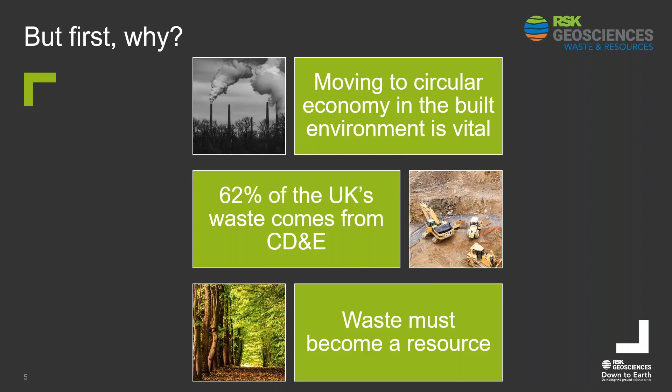So onto the waste hierarchy and circular economy. Both the waste hierarchy and circular economy have evolved over time to emphasise the design and use of a product or material before it turns into a waste. The waste hierarchy is a tiered approach which aims to maximise prevention and minimise, or ideally eliminate, waste disposal. And the circular economy aims to eliminate disposal and take it that one step further in preventing the generation of waste altogether, and then maximise the use of the resource from those materials.

Therefore, we can see that circular economy principles and the waste hierarchy share a joint philosophy, aiming to manage resources by rethinking, redesigning and repurposing in order to improve the resource effectiveness of a product or material and to reduce the generation and adverse impact of waste. The minor difference is that the waste hierarchy still allows disposal, while the framework of a circular economy doesn't, looking for materials to be reused and waste to be designed out to begin with.

The circularity principles can cover all materials. It doesn't just need to apply to items, it can apply to excavated materials and materials produced during demolition. Considering both these concepts to create a sustainable future, a regenerative circular economy that rewards the reuse of finite materials and resources must take priority and be the first consideration in the construction process.

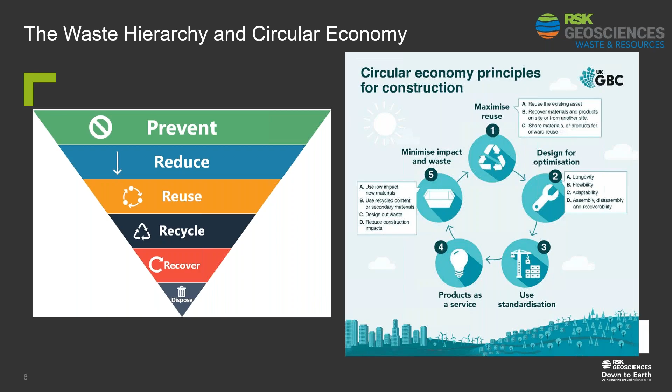Firstly, I'm going to have a look at the design and pre-planning. Applying circular economy principles and increasing sustainability in a construction project needs to be implemented as early as possible. Design and pre-planning is a crucial step to ensuring circularity and sustainability is weaved through as many aspects as possible in a project. It's a time to understand goals, policies and requirements, and to start the ball rolling with mechanisms and actions that may be required to implement that circularity.

So firstly, the design review. Designing the project for optimization is a key first step. It is important to give consideration to various aspects of the design to help implement circular economy principles, such as the longevity of the design - how long will the materials and design itself last - to ensure maximum use of products in their current use and state.

Design flexibility so that improvements and changes can be made. Consideration to the adaptability to changes in the environment as the climate changes around us, and also thinking about assembly, disassembly and recoverability considerations, to ensure materials can be disassembled in a state that can be reused for the same purpose again, or can be easily recovered as a resource for reuse elsewhere.

Circularity doesn't just need to apply to the building and structures being created, but also the materials generated through the process. Materials created during demolition, and the materials generated through site preparation and excavation, can all be considered using the same design aspects.

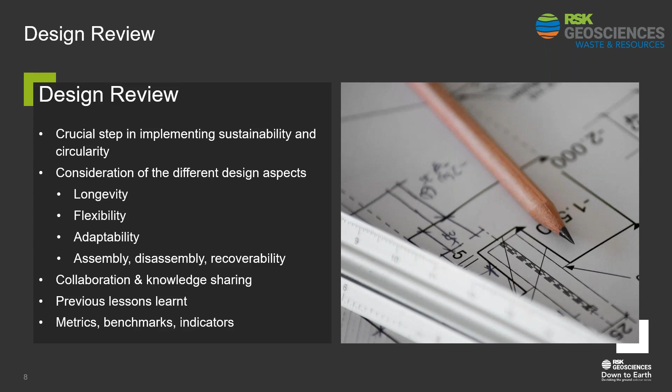Next is the pre-planning and early engagement. This is a concurrent important step alongside and following the design review, and it's where the team can start identifying what mechanisms may be required to implement circularity, especially with consideration given to those which may require permits or regulator liaison, and also to allow enough time for these to be undertaken.

Early engagement with subcontractors, consultants and regulators about the potential practical steps required is also useful at this stage. Subcontractors will have a wealth of experience and knowledge that could enhance the circularity within the project. Consultants can start to action the mechanisms where there might be permits or supporting documents and reports required, and regulators can provide early advice and guidance around what potentially can and cannot be done.

Supply chain engagement is another one at this stage - understanding what they can do to reduce waste being produced through streamlining, off-site construction and even packaging reduction, but also what circularity mechanisms they can provide, such as take-back schemes and repatriation schemes. This stage is really crucial, as ideally everything should be identified and in place prior to the project starting on the ground, to make the most of those circularity mechanisms available.

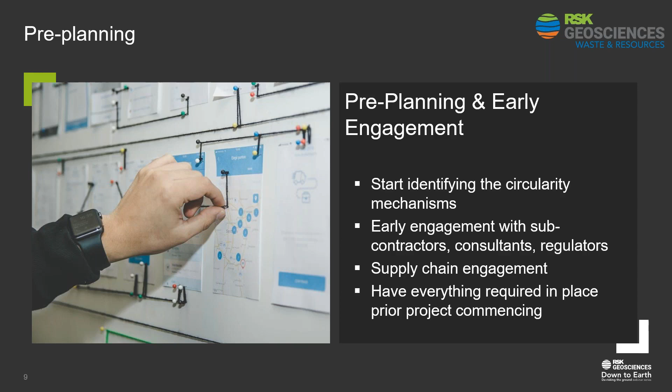So starting to think about the mechanisms that can be used to support circularity decisions at this stage. Firstly, site waste management plans. These are often used - you see them on lots of different projects - but they come in many different forms. Some can just be a bit of a tick box exercise to say that there is one in place.

But if done correctly and early in the project, they can be a really useful tool to identify where improvements can be made. Even if the waste volume and information are still estimates at this stage, the tools can identify your hotspots of material and waste generation from the works, the types of material generated, and from which phase of works these will arise.

This can then act as a guide and be further refined, so thinking about where large amounts of materials or wastes are being produced, what can be done to prevent these from being created, could the design be changed, or could other mechanisms be used, or can this material be reused elsewhere in the project?

Where there are difficult to manage wastes, what could be done with these to increase circularity, with consideration given to the chosen routes where waste needs to go off-site. Is it going to a reprocessing facility, or is it just going to landfill? If it is going to a reprocessing facility, what are their recycling rates, and are there any better options available?

Alongside this, it is a useful time to start considering carbon assessments and putting some high-level figures to the activities being undertaken. This can help with sustainability considerations and provide a different view on the materials and wastes being produced. So your site waste management plan looks at quantities and volumes, but your carbon assessment might look at how much carbon is associated with those activities and materials, showing different hotspots you might want to look at during the project.

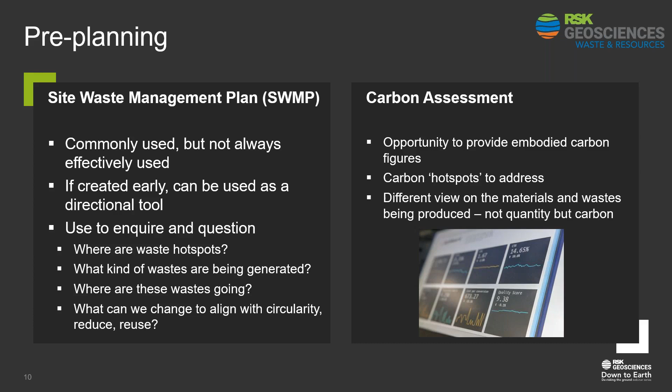So optioneering and material reuse feasibility assessments are another useful pre-planning tool. To help assess what mechanisms can be utilised, these assessments can be undertaken. They can be completed on one site or project, or on a larger scale, and if there are several projects and sites, this may actually open up more options and have more scope for implementing circularity on those individual sites and between sites.

These assessments utilise the site waste management plan and the design information to understand what materials and potential wastes will be produced from the works, whether demolition or excavation or both, and look at where these materials can be reused in the design, whether for temporary or permanent works, or even turning these products into end of waste mechanisms for reuse or resale.

The assessment can assess each of the available mechanisms and understand the applicability based on the project aims around material reuse and circularity, the materials and waste being produced, and timeframes and feasibility. The outcome is a series of suggestions and mechanisms which may be used alone or in conjunction with others to manage the materials and wastes and turn them into a resource for the project or projects.

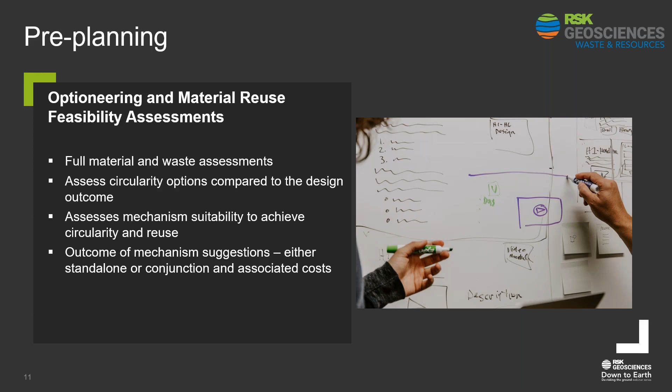So some of the mechanisms which might come out of these assessments are ordered in circularity favourability. Some mechanisms allow for materials not to become a waste, offering more flexibility longer term so waste regulations won't apply. Others utilise a material once it is defined as a waste, and others allow for a material defined as a waste to reach that end of waste status and criteria.

So firstly is preventing the material from becoming a waste in the first place. The Environment Agency puts this burden on the producer or holder of the material, who should work out if their material is a waste, whether it has been discarded, or whether it has never become a waste and meets those reuse requirements, or whether in some circumstances it has stopped being a waste and meets that end of waste test.

So everyone should be familiar with the definition of waste and that discarding element, but what about the reuse element? According to the EA, a material will not be a waste if the following apply: it is used for the same purpose for which it was designed, so the use must not be subordinate or incidental to the original use.

The previous holder intended it to be reused. No repair or no more than minor repair is required when it is transferred from the previous holder to the new holder. Any necessary repair is going to be done. Its use is lawful and is not managed in a way that indicates it is a waste.

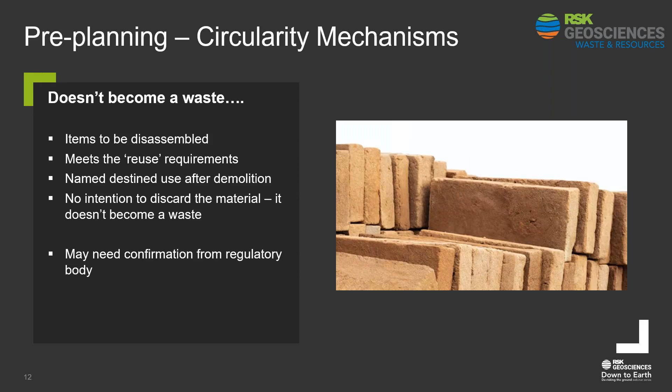it may be something to look into and may help with that flexibility of material and product reuse. So for excavated soils, the CL:AIRE definition of waste code of practice is there, and this can support with circularity being implemented and the excavated material not becoming a waste. So if the CL:AIRE DoWCoP can be complied with and the 4 principles within it demonstrated and evidenced, the excavated material can be reused on the site of origin or reused off-site without becoming a waste.

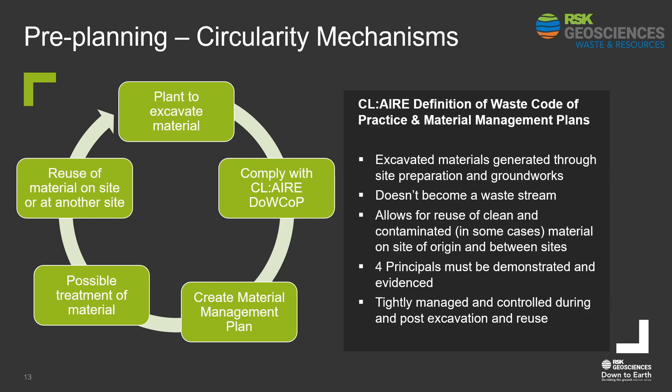Hub and cluster projects can be utilised if there are soils which require treatment prior to reuse, therefore improving the resource reusability and longer-term circularity. Obviously, this does all need to be done using a pre-approved materials management plan and tightly controlled throughout, but it is a really useful mechanism, and it allows the reuse of large volumes of excavated material either on your own site or between sites, and should definitely be utilised more often, especially with the upcoming exemption reforms next year.

Another mechanism to have a think about is the WRAP quality protocol, aggregates from inert waste. This is another end of waste option. In the project, if the project is producing inert waste, then you may be able to reprocess this under a controlled factory production control manual and potentially other permit requirements to produce an aggregate product that can be reused freely on site or elsewhere, or even put to the market. Again, this helps to increase the longevity of the material and repurposing it, but there is specific criteria within that quality protocol that must be met and followed, but it can be quite a useful one.

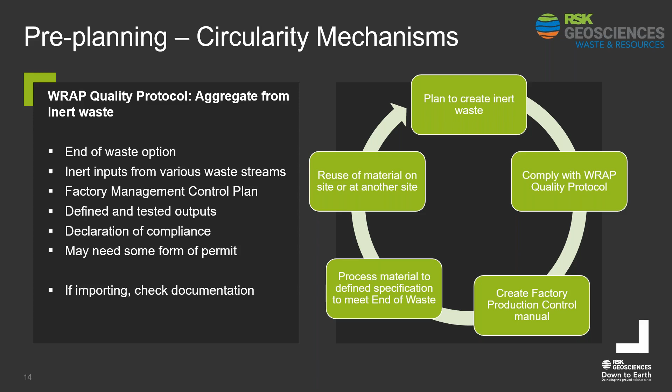One along the same lines is the quality protocol relating to composting. So some mechanisms are where you can send material away for treatment and then have it come back to you in a usable form or no longer as a waste. These may be another option to keep the circularity in the project for those more difficult to manage or process wastes that are produced. So biodegradable materials are often created during the clearance and preparation of the site.

The quality protocol for compost, which can be used in England, Wales and Northern Ireland to create compost, meets the end of waste criteria using that PAS 100 standard. This is the standard for the specification of composted materials, and that enables operators to meet the quality protocol. Once end of waste criteria has been reached, the compost can be freely reused in landscaping works or sold elsewhere because it has met that end of waste criteria and that waste legislation no longer applies.

So as with the WRAP quality protocol with aggregates, the protocol for compost acts the same. As long as the compost produced has been created in line with the quality protocol, it is no longer considered a waste, and this also helps to ensure that the specific standard is there that it's been made to, and that means that it protects the environment and human health.

Obviously, if you do send some biodegradable waste to a composting facility and you receive some compost back, it won't be your exact same waste, but you can see how this off-site use of other mechanisms can help with that circularity and that pre-processing of material and receiving a product back.

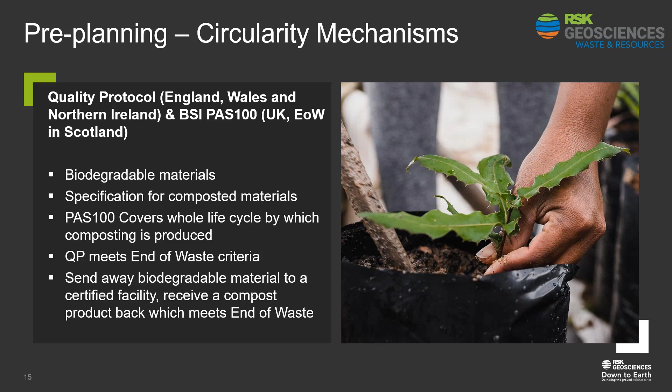Another mechanism to have a think about is regulatory position statements. So there are some out there that can aid in circularity. RPS 157 and 75 relate to asphalt management. So 157 allows for the reuse of hazardous or non-hazardous asphalt within the same site where it was lifted from, even if it is treated elsewhere, but noting there may be some other requirements, other permit requirements within this process. So for example, a Part B from your local authority.

RPS 75 helps further, so this allows for the reuse of asphalt waste containing coal tar on other sites as hard paving subbase and binding layers, but not within surface layers. However, in this case, it is still considered a waste, so duty of care does still apply. But the really good thing about this is if you use this on a site and that asphalt then needs excavating in 10, 20 years time, the process can carry on. So next time it's excavated, the same mechanisms can be applied and that circularity is continued.

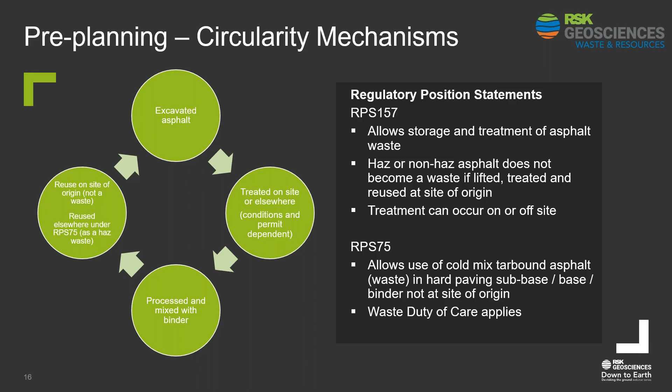One additional consideration in this stage of the process is embracing the software and programs available to support applying circular economy. There are tools which can support with modular construction and dismantling. This provides a 4D experience, with each piece of the model knowing the resources and time required to complete it. This can support with scrutinising the materials being utilised to increase sustainability, understand the best dismantling sequence to maximise resource value, and also support with CO2 estimation.

Building circularity tools can aid with selecting circular materials, choosing designs that support disassembly, and aid in designing out waste by assessing end-of-life processes based on the material types used.

There are also material management softwares which can help with tracking materials and waste on and off site, even between sites on larger projects, and can support with those upcoming mandatory digital waste tracking changes.

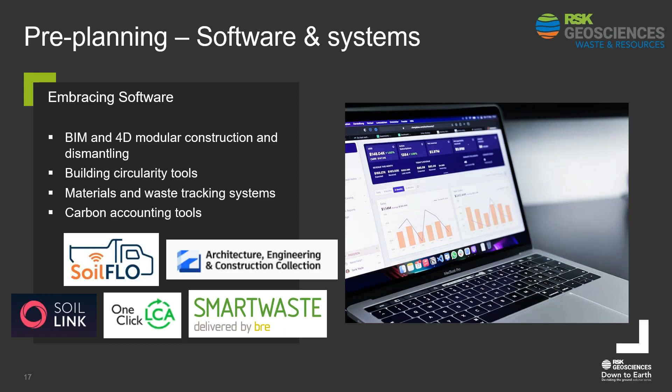So on to the next phase, that on-site management and operational wastes. Site setup plays a really important role to ensure that circularity mechanisms implementation can be achieved. It sets the tone for the start of the construction stage of the project, and ensures everyone involved is on board with the circularity aims as more subcontractors and workers join the project at different phases.

Everything must be in place on site, so thinking about documentation being readily available, waste segregation areas and containers being well set up with good, clear signage, ensuring those involved in the circularity mechanisms are fully aware of the requirements and their responsibilities within those processes.

This helps make things easier for everyone, and the easier things are, the more likely the aims will be achieved. So clear project phasing, clear direction, and things being clearly marked out.

Informing and disseminating information at the start and throughout the project helps ensure everyone is aware of requirements, but also aids in increasing engagement. So explaining the whys, providing the reuse or recycling percentages, and also that carbon data, so people can see the process they're supporting and the difference they're making.

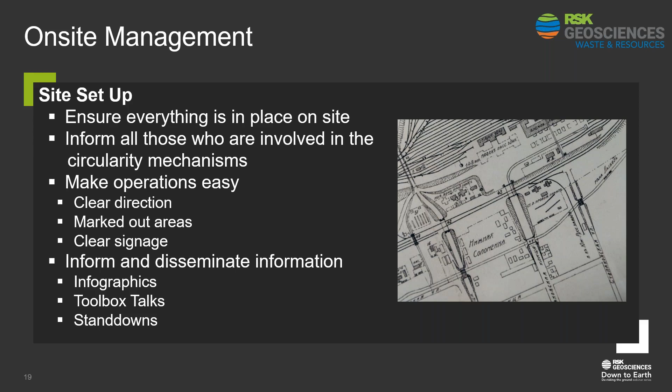Another aspect to consider with on-site management is closed loop take-back schemes. I mentioned these earlier in pre-planning, so having these implemented on site can really help with materials being sent back to suppliers for reuse or recycling into new products, or into the same product again.

These schemes have grown massively over the last few years and can be utilised for some difficult to manage waste streams as well. It is beneficial to liaise with suppliers and manufacturers to understand what schemes are offered and how these can be best implemented on your projects.

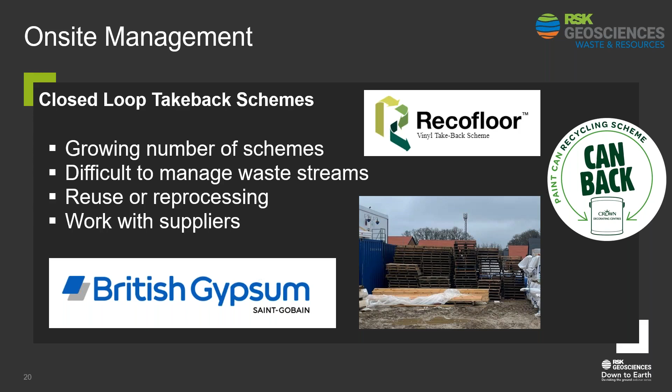Through the construction phase of the project, there may be waste streams generated which are more difficult to manage or may not have readily available circularity mechanisms. These may be smaller waste streams such as PPE or food waste generated through the operation of the site, but they should all be considered to achieve circularity.

This is when a further bit of research and the application of maybe some innovative or new ideas, and also some past learning from other projects, can be implemented.

For items such as PPE, there are more and more recycling schemes popping up now. However, some may be more efficient than others due to the use of energy from waste compared to shredding and reusing those fibres for new materials. So it's good to question and interrogate to understand where those materials are going once you send them off site.

For food wastes, there might be consideration given to on-site digesters. These can break down food waste using enzymes and agitation, producing only an effluent from all the broken down food waste. Liaising with waste contractors and understanding costs is a good approach, understanding where the end destination is and where there may be a more circular end destination. So, for example, reprocessing instead of energy from waste, or at least energy from waste instead of landfill.

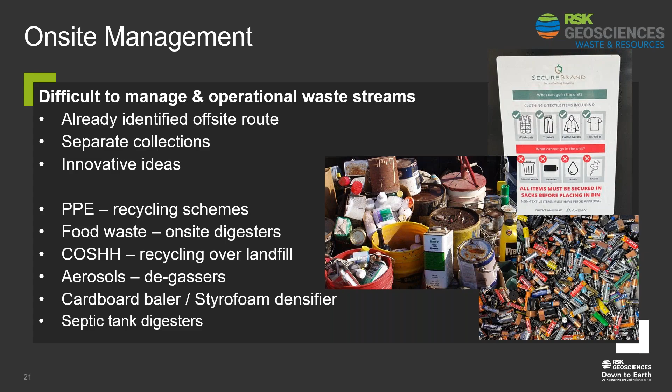So once your construction project has finished, there is the post-construction phase to think about. The process for circularity doesn't stop once your construction project is finished. Data collation and review is a really important step following this. The project team want to ensure that the final figures of materials reused and those waste streams that needed to be disposed of are captured.

Carbon assessments and site waste management plans can be returned to and reviewed. The original estimates of materials and waste generated can be compared to the actual figures from the project, understanding what worked well and what may not have worked as well. Information can also be gained and shared with the supply chain and subcontractors to aid future learning, and the data can be scrutinised and questioned to further inform the review and refinement process.

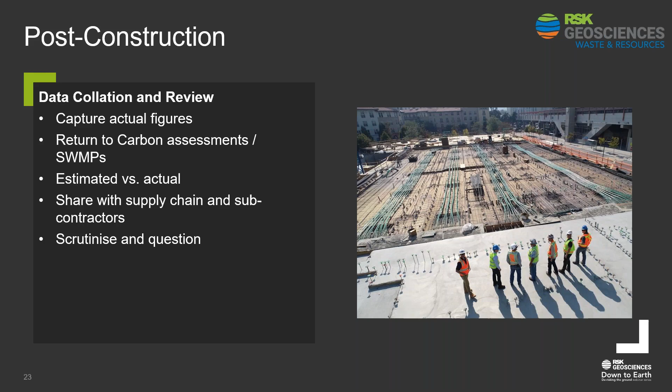So that review and refinement process is another important step post-construction. Implementing circularity should be a consistent process. It won't be implemented straight away on your very first project, but it can be something that grows and expands over time with every iteration, and this can improve your projects and reach those circularity goals. It can look at what can be done better and what can be done differently each time.

These reviews and refinements should involve everyone in the chain as well, from designers through to the building contractors and also your supply chain. This helps bring together knowledge, learning and collaboration, and further implement those circularity principles in the next project, creating action plans that can be utilised.

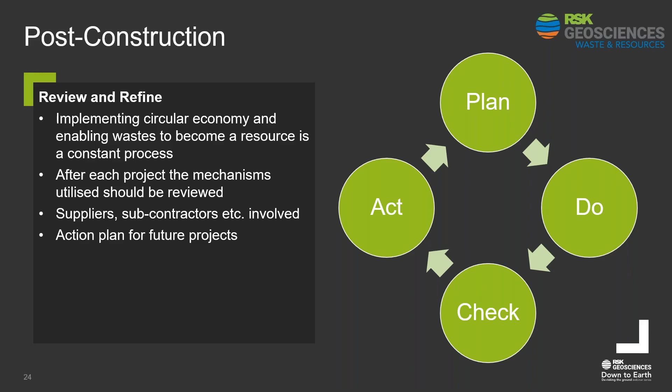So in summary, there are a lot of options and mechanisms to implement circularity in the construction process when thinking about waste and resources. The view on circular economy should be applied to all materials produced during the demolition, excavation and construction phases. Circular economy principles can be applied and achieved through the whole project, by allowing time to undertake the design process with reviews and circularity considerations such as longevity, flexibility and disassembly, by giving pre-planning and early engagement the importance it deserves, utilising previous lessons learned, sharing knowledge and collaborating together.

By applying circularity mechanisms to manage materials such as soils, inert wastes, biodegradable wastes and those difficult to manage waste streams, and by taking the time post-project to review data, understand what worked, understand what may need refinement, and take those lessons onto the next project, this can all enable circularity to be applied within our industry, turning waste into a resource and also protecting our environment for future generations to come.